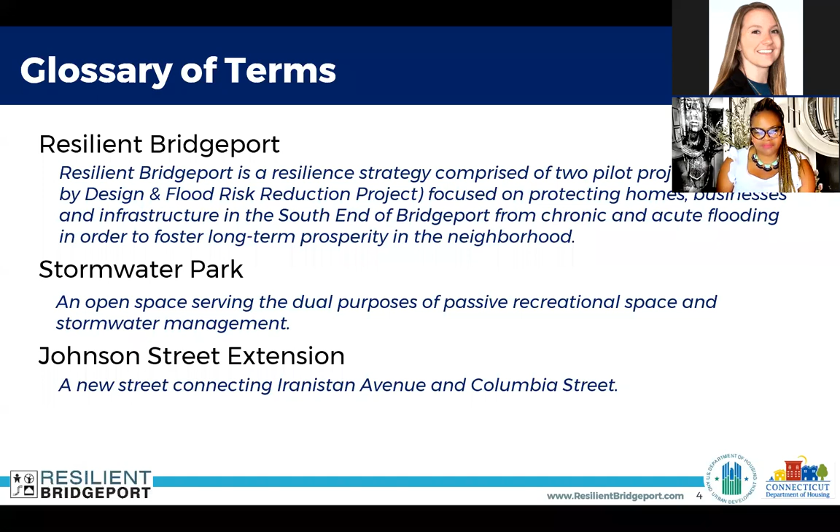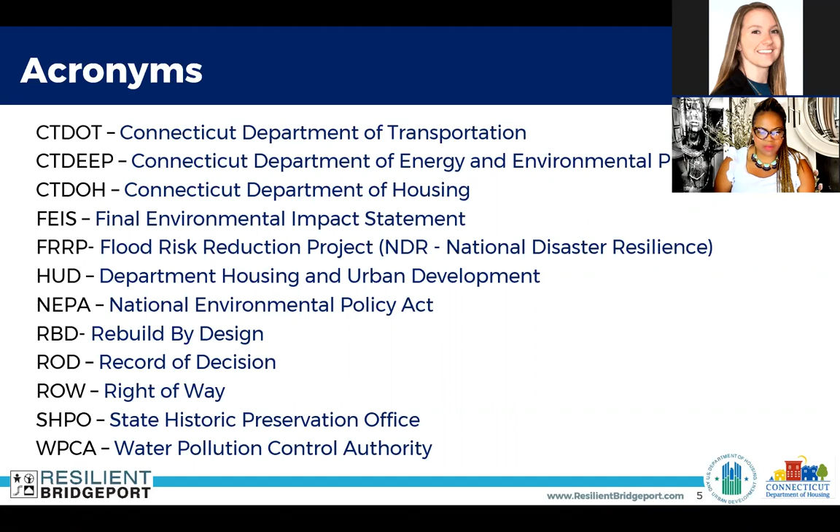So the Resilient Bridgeport team consists of the Connecticut Department of Housing, DOH. We are the grant recipients, owner of the project, and the program manager. Connecticut Department of Transportation, DOT, is helping Department of Housing with design administration and right-of-way activities. As I've mentioned, Department of Housing doesn't actually build or construct development in affordable housing; we just provide those opportunities for developers. So we enlisted the help of our sister agency, DOT, to help us with construction, planning, and right-of-way. Connecticut Department of Energy and Environmental Protection, DEEP, is responsible for flood control infrastructure ownership and maintenance on the project. So we have a trifecta of 3 sister agencies working on Resilient Bridgeport.

And we also have WSP USA. WSP is our prime design consultant, and all members of the group are part of tonight's panel to answer any questions you may have. Next slide.

And now we will turn it over to our design team. We have Rich Pettinelli, our lead designer, to speak about Rebuild by Design.

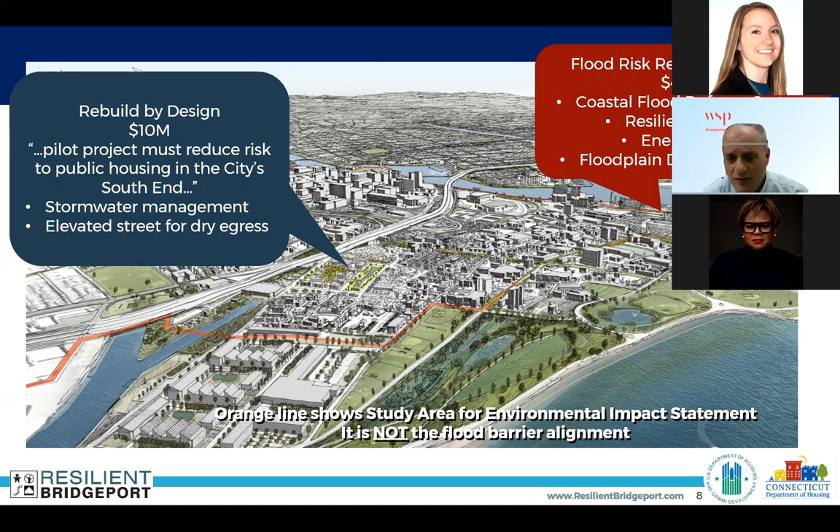Thank you, Deputy Commissioner. So this slide will just orient us all as to where we are and where we're talking about. Here you see the two projects that make up Resilient Bridgeport. The FRRP project, which we discussed back in April, is located over on the east side of South Bridgeport. This area, RBD, that we're talking about is more towards the west side. It is the site of the former Marina Village housing complex. The goals of this project are to provide flood risk reduction and stormwater management, and provide dry egress to the area and the neighborhood. Next slide.

So the program status: we do have our environmental documents complete. We do have a record of decision, and that goes for both projects. Final design has been initiated for both projects. They are both at the 60% design level now, and we are receiving and acting on comments on both projects. The federal grant expenditure deadline for this money is September 30th, 2023. Next. So where do we stand with the RBD design?

As we said, the RBD design is located at the former Marina Village site, and it will be a raised egress Johnson Street extension to get people to the east and to high ground.

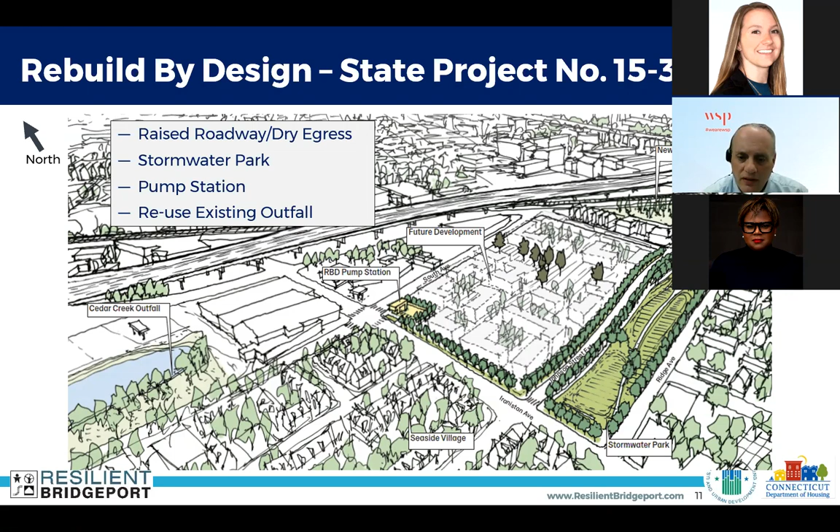We've gone over this dry egress. The components include a stormwater park, which we'll discuss in more detail, and a pump station. As far as stormwater goes, we are providing connection points for Seaside Village when their stormwater does get separated. Currently, we are continuing to revise the stormwater model for the area in accordance with the revised plans, and keeping it up to date with our design.

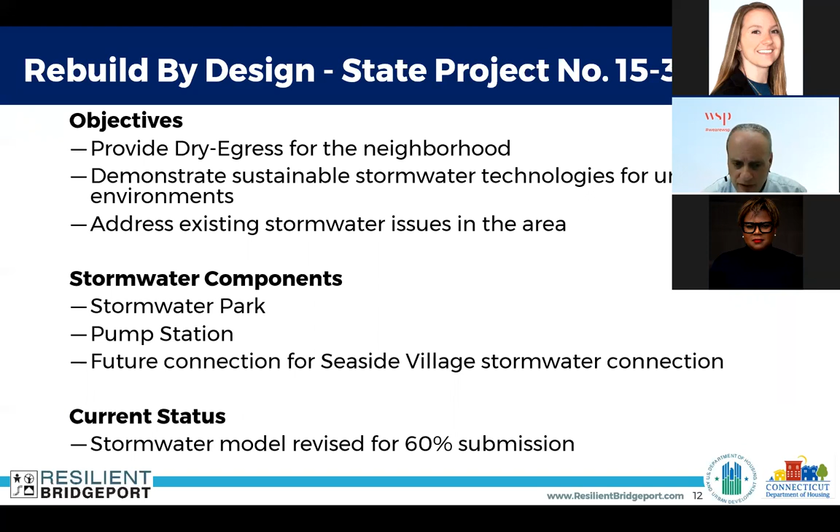There are three components to this. The first is an extension of Johnson Street, about 866 feet running from Iranistan Avenue to Columbia Street. We do have to do some improvements to Columbia and to existing Johnson Street to accomplish that. The second is a stormwater park located south of the Johnson Street extension, about the bottom quarter of the former Marina Village site. The third is a pump station located at the intersection of Iranistan Avenue and South Avenue, with a discharge flowing out to Cedar Creek, located at the upper left-hand corner of this picture.

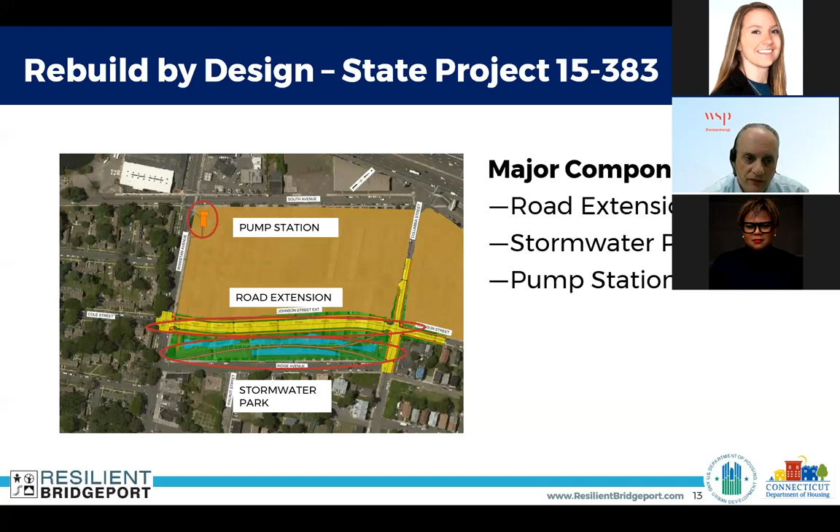Let's look at each one of the elements for this. So, the roadway improvements.

We're constructing a new roadway, terming it Johnson Street Extension for the purposes of this design. It will extend from the intersection of Cole Street and Iranistan Avenue through the existing Johnson Street over Columbia Street. The roadway will be elevated to provide dry egress above the 1%, which is your 100-year flood elevation.

Maximum elevation on the roadway tops out just shy of 16 feet. As we cross Columbia, there is about 2.5 feet of elevation that we have to put on to maintain that egress, and we'll bleed that out to meet the existing grade on Johnson Street as we travel to the east. So there's about 340 feet of work on Columbia and about 300 feet of work on existing Johnson Street.

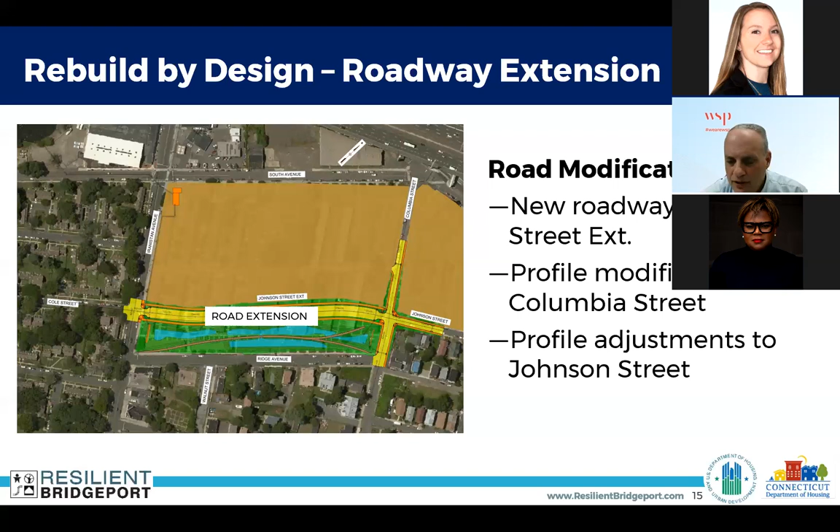So what are these roads going to look like when we're done? On Iranistan, we're not really doing a lot of work. We're going to mill and overlay, or remove the top layer of pavement and put down a new layer of pavement. That's really done so we walk away with a smooth condition, and we meld the existing work into the proposed work. We're not changing the profile, the elevation, or the cross section of what is currently on Iranistan. We're simply going to give a new layer of pavement on it and smooth out all the work that we're doing.

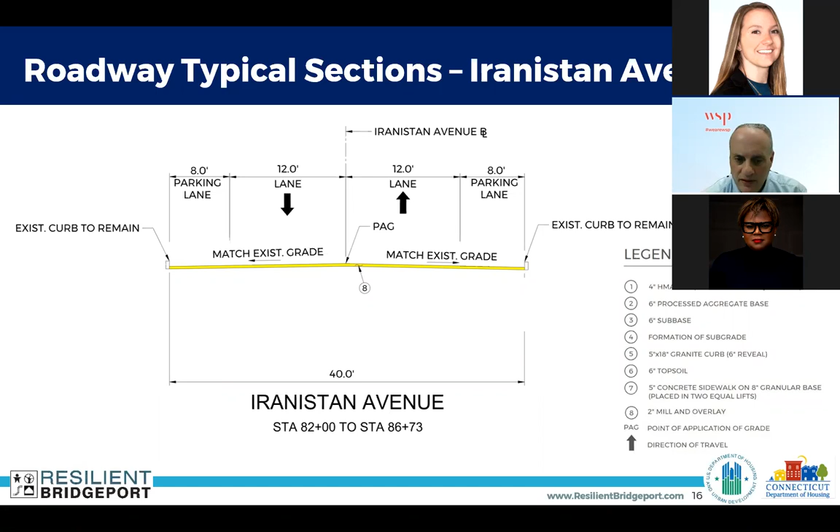Now, Columbia Street, we are elevating it, so we have to do a little more work there. Columbia has two cross sections in the project area. North of the intersection with existing Johnson Street, it is a one-way road with a 12-foot travel lane and an 8-foot parking lane. Again, our intent is to replace what was there. We're simply elevating it, so we will put a 12-foot lane in and an 8-foot parking lane.

We'll have 5-foot walks on both sides with granite curbs. The project is elevated a bit, up to 2.5 feet, so we will slope out at the ends to existing grade with a 3-to-1 slope, which is your standard slope, walkable and easily crossed.

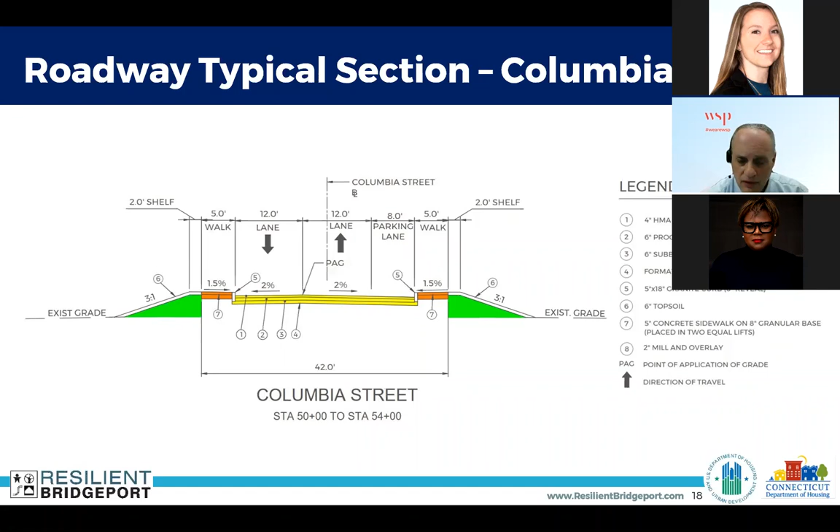South of the Johnson Street intersection, Columbia Street is two-way, with two 12-foot lanes and one 8-foot parking lane. Again, our intent is to reproduce that, just simply elevating it. So much like the section north, we're going to put back what's there. We're going to give you new 5-foot sidewalks, granite curbs, and then grade it out to match existing grade once we're off of the travel way.

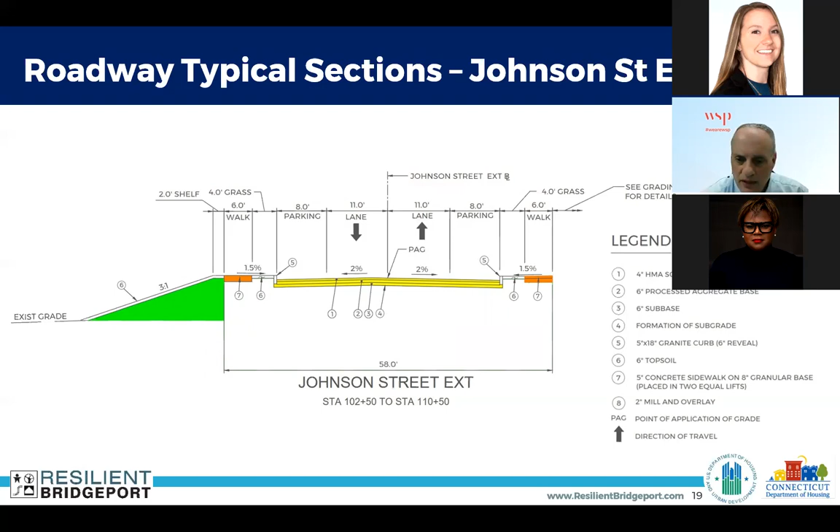Johnson Street extension will be two-way traffic, with two 11-foot lanes and 8-foot parking on both sides. Here we will put a snow shelf in, a 4-foot grass strip after granite curbs, and then 6-foot concrete sidewalks. You'll notice there's only one embankment, reflecting the embankment going north into the remaining portion of the former Marina Village site. To the south, we'll be grading into the stormwater park, which we'll take a look at later. The grades there vary as we address different areas of that park.

The vast majority of the construction activities for the road work, and in fact for most of this project, are off of an existing roadway. They're in an open field. So we don't anticipate any traffic impacts as we construct Johnson Street extension and, to a large extent, the pump station. When we get to Columbia Street with the elevation change and Johnson Street with the change in profiles, there will be some traffic impacts. Both streets are too narrow to allow one lane of construction while traffic operates on the other lane, so they will need to be shut down.

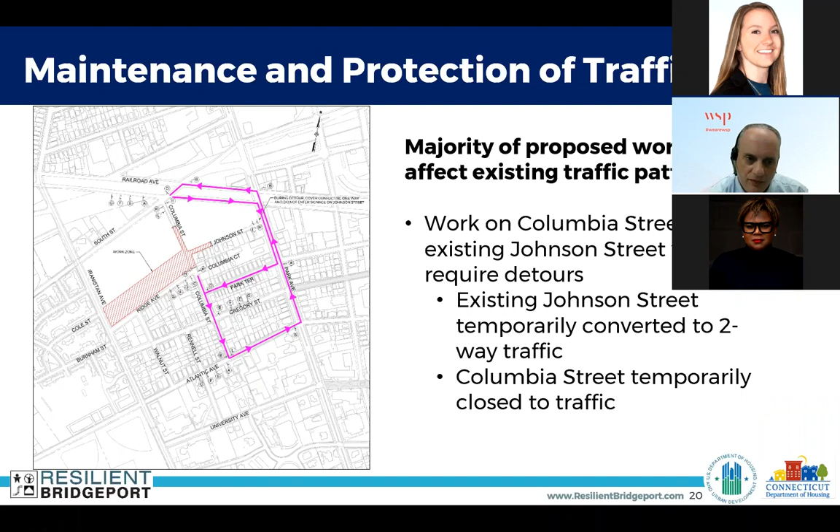So to do that, we will institute a detour. Visible here, we'll be diverting traffic basically to Park Avenue, then using the streets south of Johnson Street as connectors between Johnson and Park, so we maintain that east-west connection. While we're doing this, the existing Johnson Street will be temporarily converted to two-way traffic, since you won't be able to access it from the western intersection with Columbia.

So the second aspect of the project is the stormwater park. It's a stormwater park in that it's an area we want to encourage people to be in during dry weather. During wet weather, as an engineer, I would call it a detention pond. It will act like a detention pond, taking in the stormwater for a surrounding area, retarding or reducing the peak, and conveying it to the pump station for ultimate discharge into Cedar Creek.

The stormwater park is designed to handle and convey a 25-year storm with no increase in runoff. That's about a 6.8-inch storm, so it's a good significant storm. The drainage area contributing to it, as of this design, is 13.3 acres. There is potential to increase it with changes to the existing drainage system in Bridgeport. The city can add on to the system coming into the pond and help more of the area.

Right now, with the 13.3 acres, we'll be taking a peak flow of about 27 cubic feet per second and reducing it to about 9. The stormwater park is divided into a number of chambers or ponds. This is a 3-pond design, though we're actually evaluating a 4th pond here. The flow or the height in each one varies according to the amount of water coming in and the rate we're going to allow it to pass through that chamber.

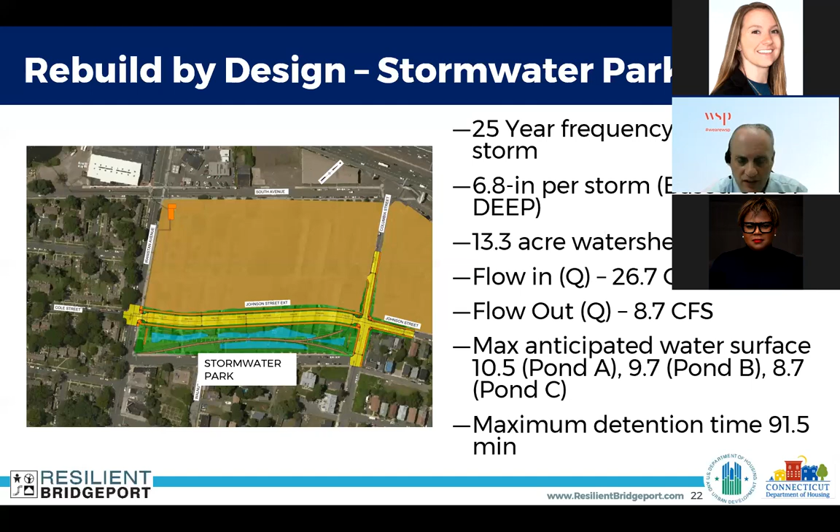One of the things we're looking to do, given the volume of water we're anticipating, and the fact that this pond has a dual function as a detention pond—unlike the FRP project, this pond will see water every time it rains.

So with the volume we're anticipating, there's potential to put in some green infrastructure, basically like a wet meadow, and these are defined by the state under various classifications depending on the water quality you get.

There's a listing of plants that can be planted given the volume of water—it's called the water budget. By using these types of plants, we're actually doing two things: first, polishing the water.

We're removing pollutants, including suspended solids, phosphorus, and metals, as they are absorbed through the plant biofilters. We're also encouraging different fauna and flora to grow.

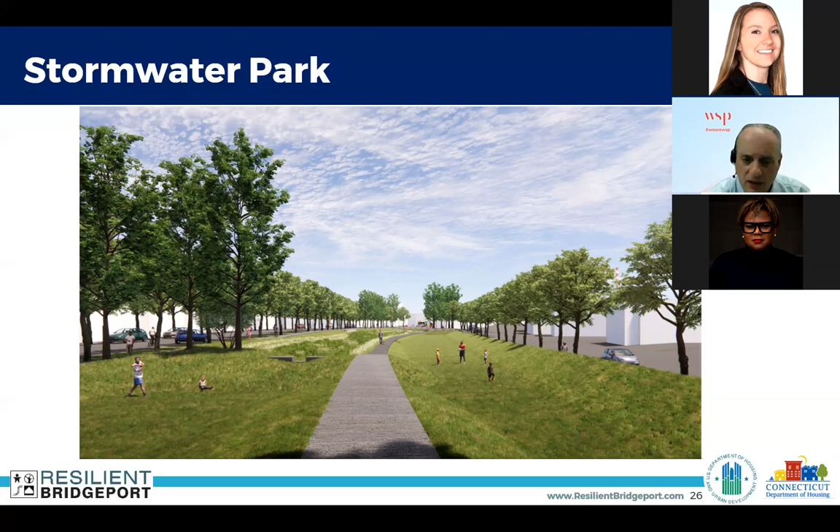So the third element is the pump station, located at the corner of South Avenue and Iranistan. The pump station will be constructed such that the elements are above the 100-year flood, and it will operate during a 100-year flood.

This will be a submersible pump station, much like the FRRP pump station you might have heard us talk about. The pumps will sit in the wet well, or in the stormwater as it comes out.

We are designing this for a maximum capacity of about 30 cubic feet per second, or 23 million gallons a day. That is divided among the water—stormwater coming from the stormwater park, and an anticipated contribution from the city of Bridgeport from Seaside Village at two locations.

We will meet the capacity requirements for operation with one standby pump. There are three pumps in this pump station, and we will meet the flow capacity requirements with two, so one can be offline or under repair.

And finally, the pump station does have a standby generator. In this case, it is interior to the building and will be able to operate when power is down.

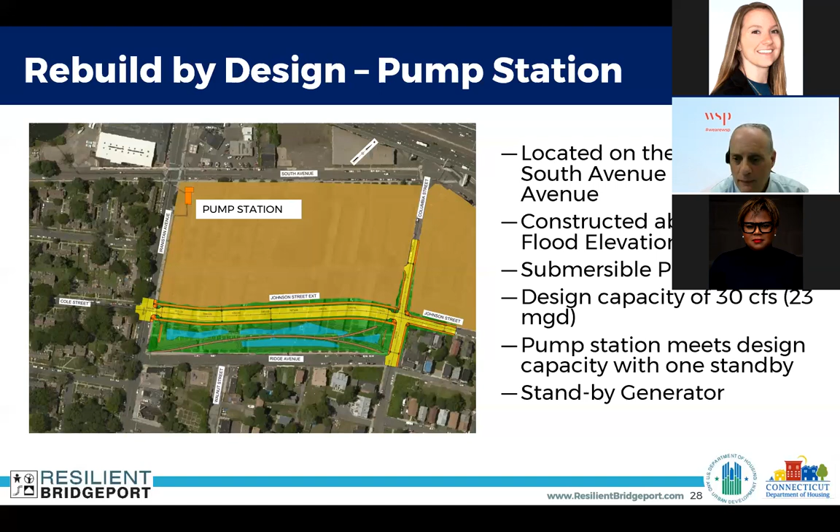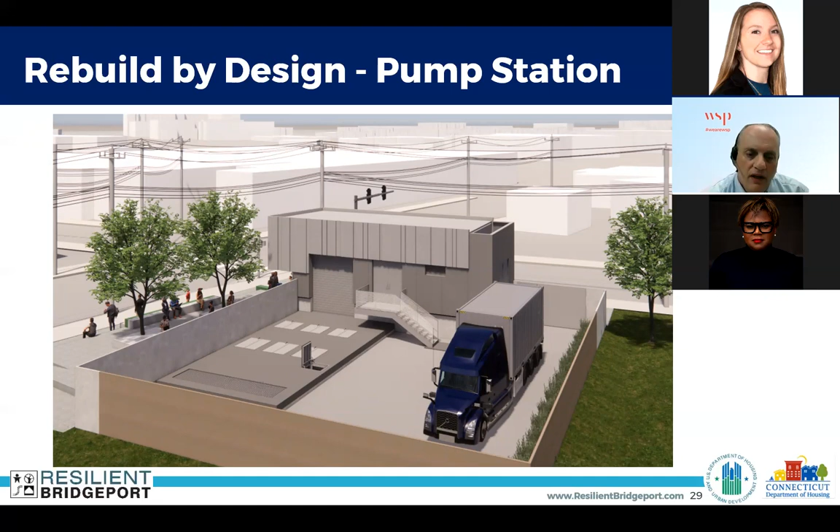There will be a trash rack—that's the first element you see moving up from the bottom. That'll capture any large debris that gets into the system that we don't want moving through the pumps, so sticks and such get hung up there.

The second thing you'll notice is a series of six doors, or overhead doors, Bilco type doors, installed in the roof of this wet well. The first three of those are to access the pumps, and the second three are to access the valves.

We'll see a cross section where this comes out a little cleaner, but we don't enter the wet well or the pump station to get the pumps—you can pull them up through these hatches.

Other things to notice here: the access to the yard is off of South Avenue. We don't want that type of traffic coming in off of Iranistan where it faces Seaside Village—we want to direct that more towards the commercial industrial aspect of South Avenue.

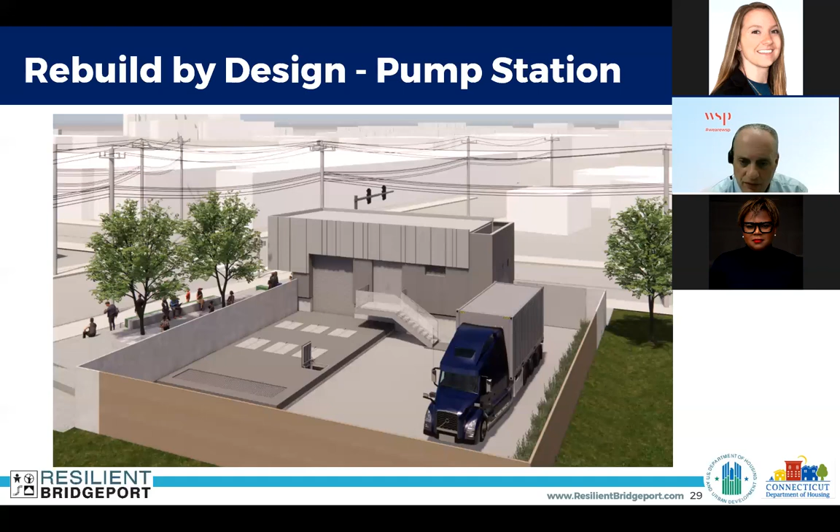Next, this is a view of the structure looking south on South Avenue, looking westerly towards Seaside Village. As you can see, we're doing an architectural feature of it, and the access point is here on South Avenue.

There is no access to the actual pump station from anywhere the public can gather. All access is secured behind the fence.

This is a view from the corner of Iranistan and South. South is going off to the left of this picture and Iranistan is going off to the right. In this view, we're looking to the southeast.

We recognize that this pump station occupies a pretty strong position in this development and in this area, and we want to make it as attractive as possible, make it a public area, and recognize its position of strength in the development.

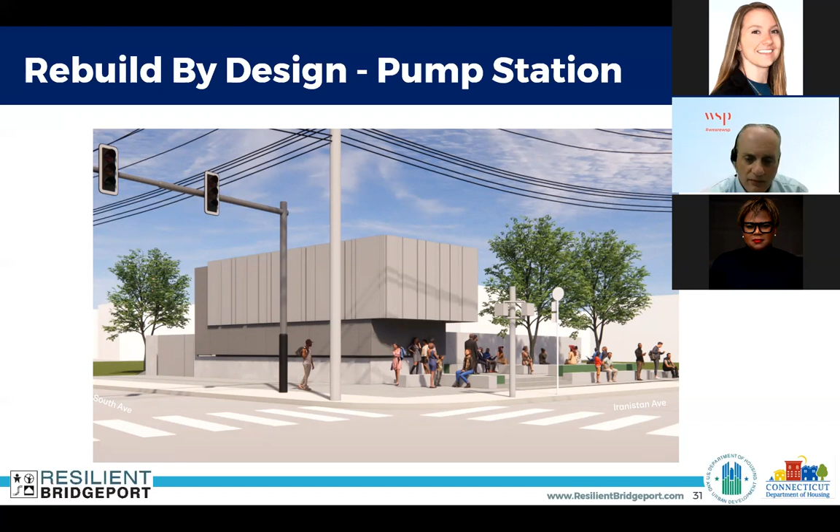So we're doing an overhang. This will allow some public gathering. We'll do landscaping in this area as well. There's a bus stop here, and it'll allow a refuge during inclement weather underneath that, and just offers some aesthetic elements to the design of the pump station.

So these are 2 cross sections of the wet well. In both of these, the pump station, the actual structure that you saw, would be off to the left of what we're seeing here. Water in these 2 drawings will flow from the right to the left. If we look at the bottom one, which is a cross section, it's a vertical cut going down the wet well. You see the first element there is the trash rack.

Again, we need to capture large debris before it gets into and fouls the pumps. The second element, that concrete wall hanging down, is a baffle. We need to break the velocity and calm the water down before it gets to the pump chamber.

And then you could see an outline of a pump. So the pumps are sitting in the wet well. There'll be a rail system that we can use to bring the pumps up to the surface to service them, and then the pipe discharge goes out.

On the upper drawing, you can see how this works. There we have the trash rack to the right of the picture, the pumps with the access hatches dashed above them, and then the valve pit. The 3 discharge lines connect up through what's called a manifold into one pipe, and that will run down South Avenue and discharge through an existing outfall in Cedar Creek.

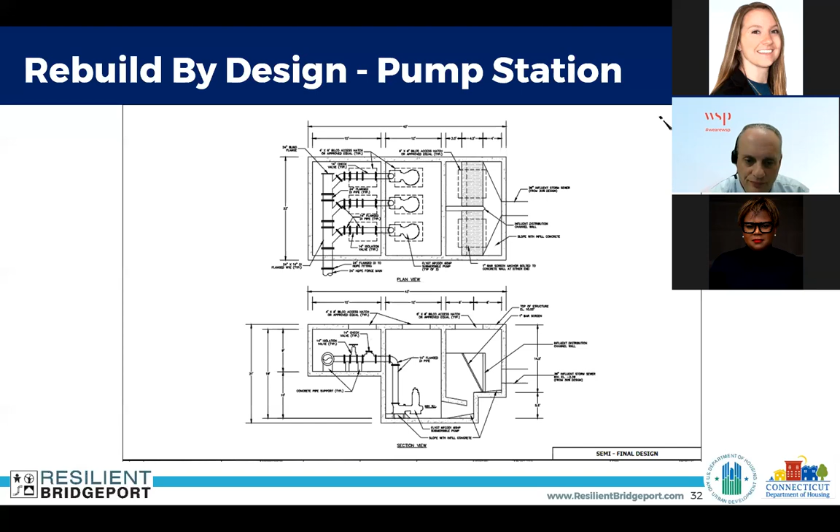So this is the outfall. The gentleman in this picture is actually kneeling on the pipe. We did do an inspection of it. It's about a 32-inch pipe and in good condition, so we're pretty confident we could run, basically push a force main through the existing pipe and have it discharge here.

As you can see, there is some debris that will need to get cleaned up, and we will need to assess the outfall conditions to make sure the additional flow we're introducing doesn't cause erosion. The second picture on the left is just the embankment behind it. We're not anticipating having to dig that up; we're thinking we'll push it through the pipe, called jacking, and that will work.

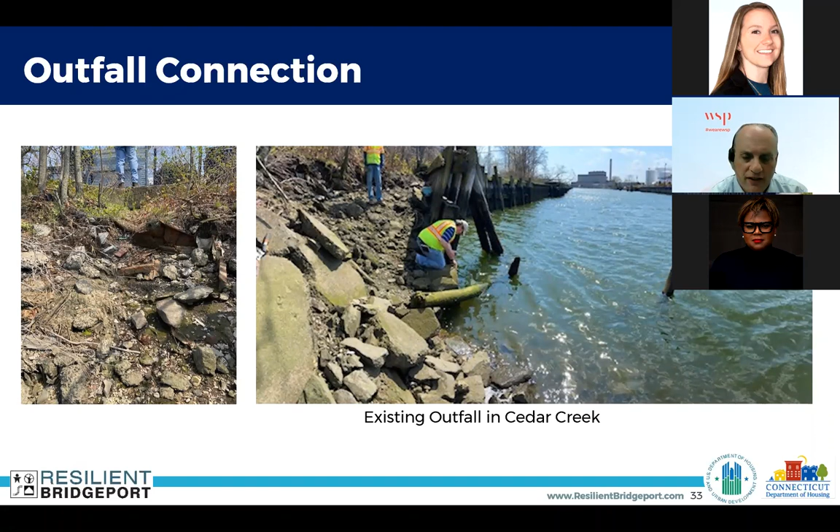So this is a good segue into the permits we require for the project. We will need a pre-construction notice for the outfall protection. It's minor work, but we do have to evaluate whether the additional flow going out the pipe will cause any erosion, and we would have to provide riprap or something to protect the existing environment in Cedar Creek.

We need a general permit for the discharge of stormwater and dewatering wastewater. We'll need a 401 water quality certification because we're discharging there, a Coastal Management Act consistency review since Cedar Creek is coastal, and a land and water resource certification of permission, which is the permission to clean up the debris immediately downstream of that outfall that you could see in the picture.

Finally, there's a potential, and we don't have the answer to this yet, that we might need a dam safety permit. Depending on how much water we end up storing above existing grade in the stormwater park, that will dictate whether or not we need a dam safety permit. We continue to evaluate and monitor that and work closely with DEEP to see if we qualify for this permit.

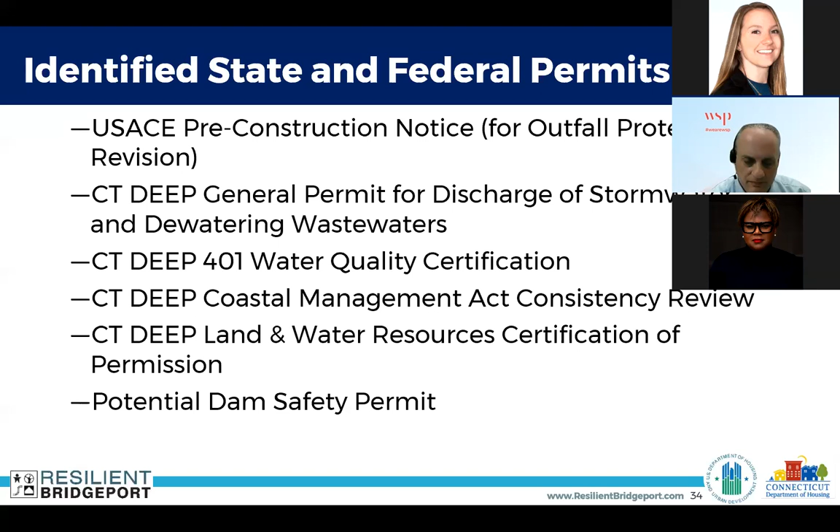So where do we stand? As we've stated, we handed in the 60% semifinal design earlier this spring. We are starting permit applications as we speak. We will proceed to the 90% design, with another 90% design meeting like this to review refinements sometime in the fall of 2021, with 100% design due in the winter towards the end of the year. Permits should be issued early next spring, and construction is anticipated to start in the spring of 2022.

We anticipate that this will take 2 construction seasons, mainly because of the pump station, so we anticipate completion in the fall of 2023.